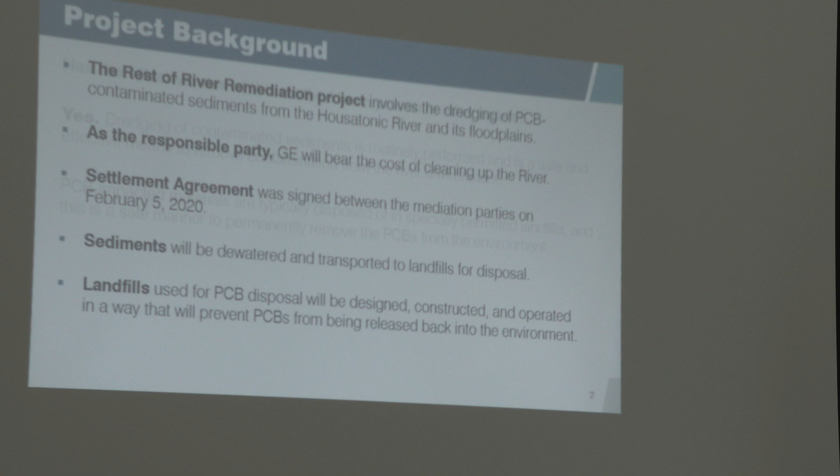At this point, I'm going to hand it off to Brian, who will be able to talk a little bit more about the Upland disposal facility design and our team's analysis.

I'm sorry, I didn't go through the slides, but if you go to the next one, there's some headshots of our team. Well, oh, you're already there. Yeah, great.

Okay, hi everyone. So as Linda mentioned, we are right now looking at the Upland disposal facility. This is the latest design document that has been submitted by GE and their consultant, Arcadis.

The UDF is essentially a new landfill that is going to receive the vast majority of the sediments removed as part of the Rest of River project. The landfill is being designed in accordance with the EPA category for hazardous waste landfill, known as a RCRA Subtitle C landfill. A lot of the details in this report reflect the criteria and specifications that EPA have established for design and operation of landfill of that type.

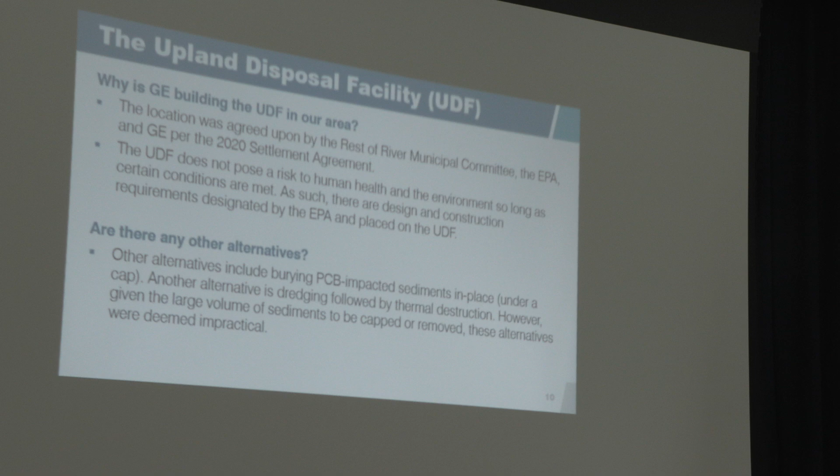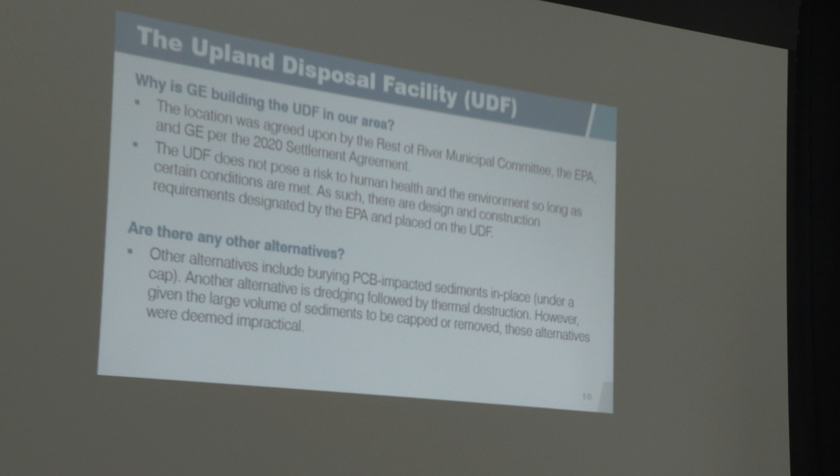So our review at the moment is looking at the design vis-a-vis those EPA guidelines and requirements, and also in comparison to what we know from current best practices for design of these facilities. So we'll get to that a little bit.

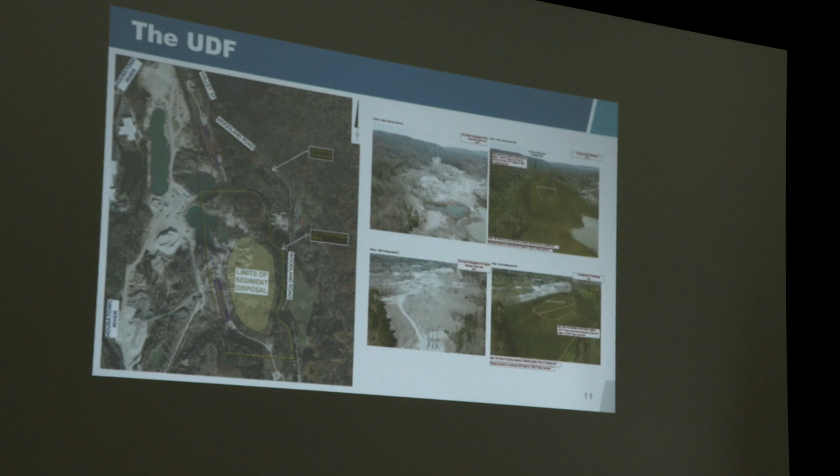So you guys might have seen some of these images on the town website. On the left-hand side, you can see the site for the UDF. It's located at a portion of the Lane Construction company facility just over the border in Lee. You can see the limits of sediment disposal - that's basically the footprint for the UDF.

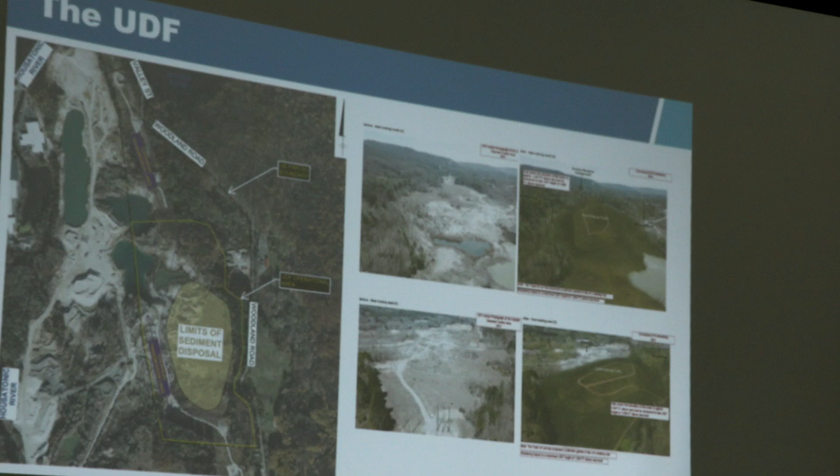At the site, we also have some power lines running through the site on the west side, so that does limit the footprint that's available. They also have areas for management of stormwater, operational areas that they'll need for equipment and materials during construction, and they've laid out some of these items in the plans that we've received.

The site will also have facilities for collection and storage of leachate - that's the water that infiltrates or leaches out of the sediment that's deposited in the landfill. So we have a system in place to collect that, pump that, and store that for us to export.

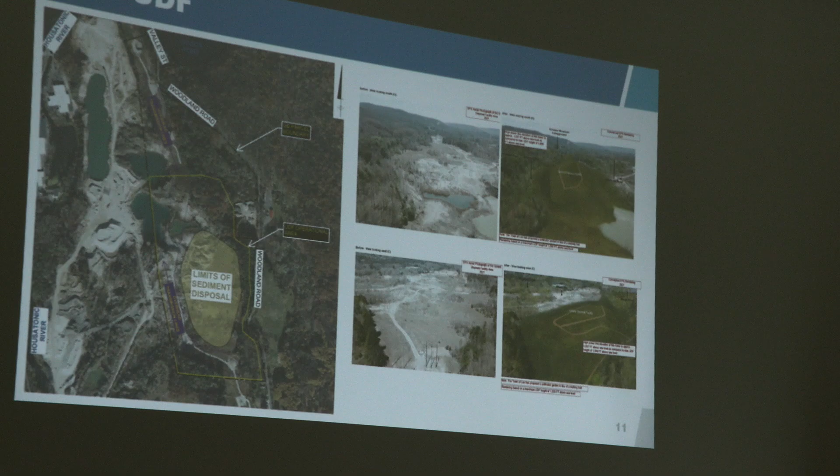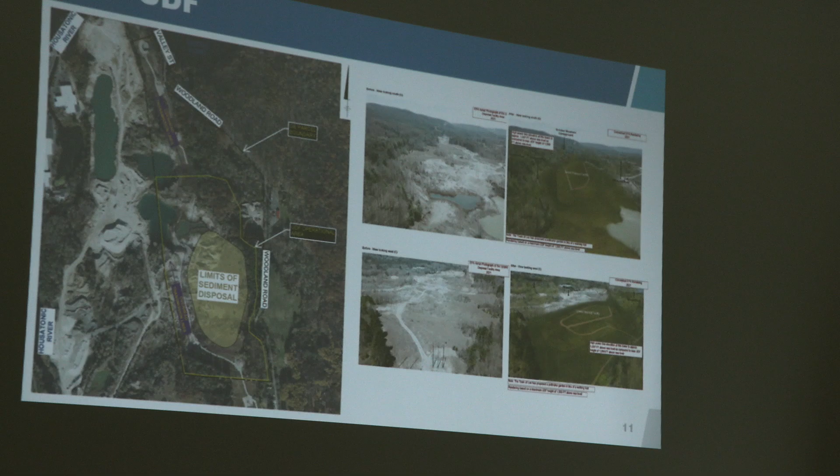I also included some images here of the Lane property as we see it today. You can see what's left from historic quarrying operations there - a pretty scarred landscape, not much vegetation, exposed sand and gravel and soil that's residual from the quarry.

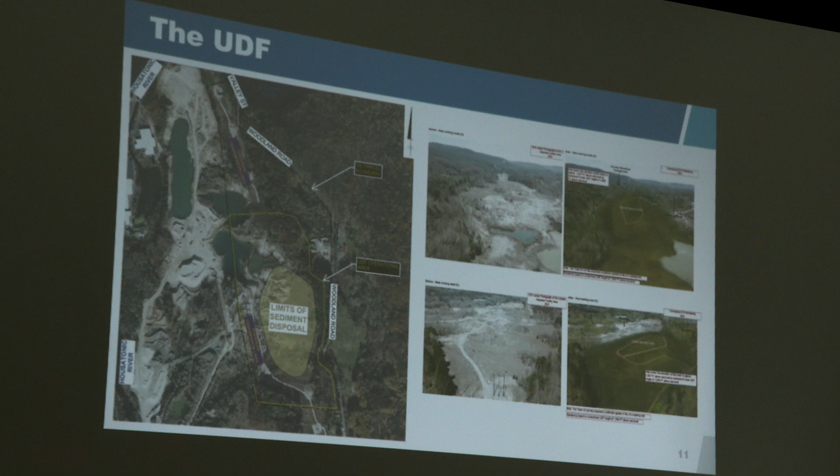On the right hand side, you can see the equivalent future rendering of what this UDF will look like. Just a big picture - you can see the green vegetated mound at the center of the site, and the line work that represents the access road for the landfill so that it can be maintained, mowed, inspected and so on. So I'm just going to give you guys that perspective before we get into the details here.

So the UDF itself - these drawings are from the design documents that we've received most recently from GE. On the left-hand side, you can see an engineering plan view of the UDF. It consists of, first and foremost, a perimeter berm.

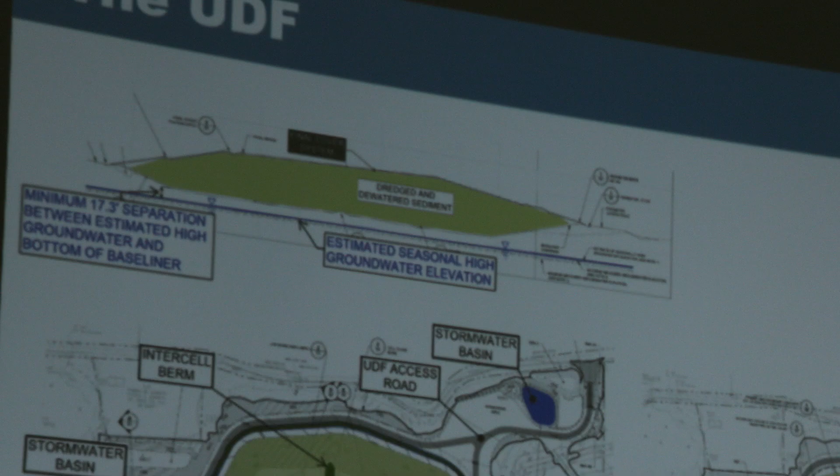So what they're creating here is essentially a bowl - they're excavating out material at the center, and using that material to build a perimeter berm all around. So you have what essentially looks like a football bowl, Pasadena Rose Bowl would be a good way of thinking of it. That's what's being constructed initially for the landfill in preparation for receipt of the sediment.

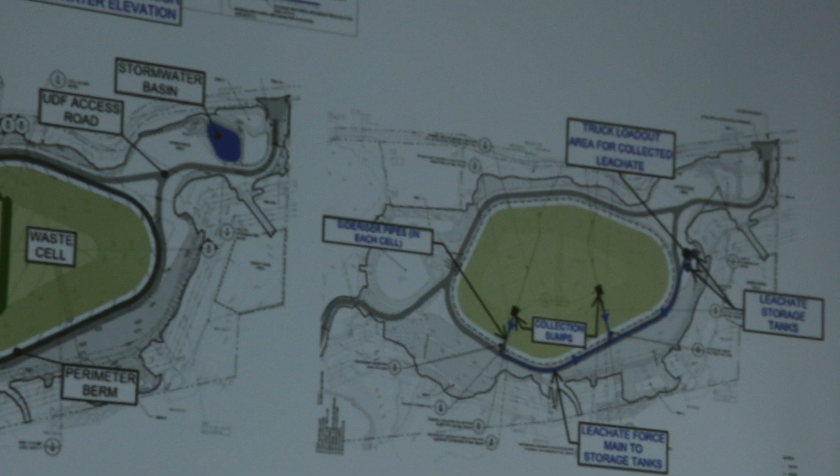Now that berm on the base of the landfill will be constructed with a liner. This is one of the main requirements of the EPA rules on Subtitle C landfills. The liner in this case is the protective or impermeable barrier that prevents leachate or sediment from leaving the landfill and re-entering the environment, whether it's in the soil below or further down to the groundwater.

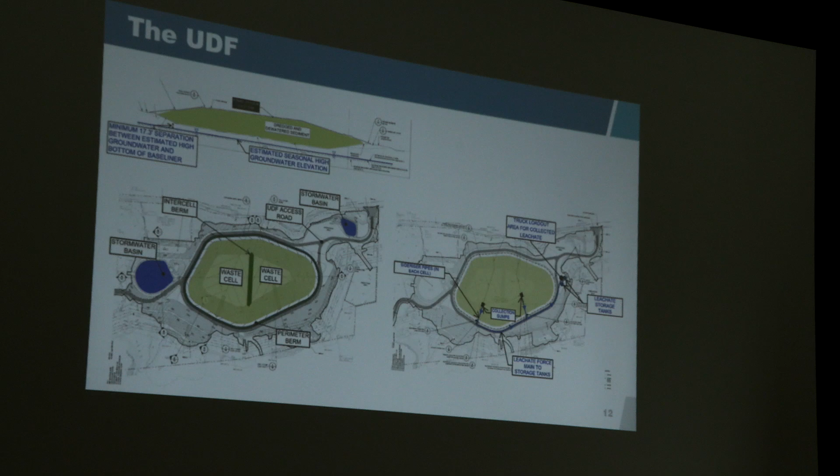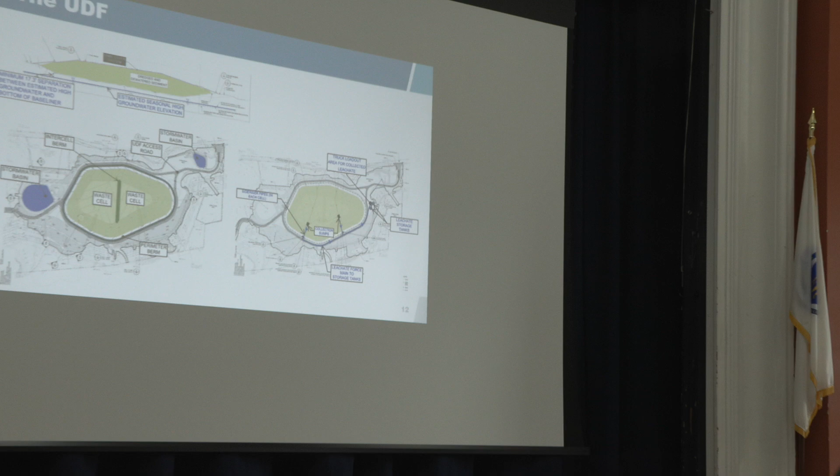That liner system, under these rules, is the most protective type of landfill. It's called a double liner system. There's two distinct layers: a primary liner as the initial protective layer, and then a secondary liner underneath that as double protection. And what that allows us to do is assess the effectiveness of that primary liner in preventing infiltrating leachate from going through that liner.

There's a leak detection system in between the two. It consists of a series of pumps with flow switches that will detect anything that passes through the first liner and down to the second liner. So that's the essence of the extra protection here - we have that ability to assess the function and operation of the primary liner.

The landfill - sorry, engineering drawings, please. Just a couple of other things: the landfill is broken up into two waste cells. This gives GE some ability to organize their filling operations a little more consistently, so that they can fill one side to a certain point, add a temporary cap to that so it's covered, and then work on filling the second cell, kind of flipping back and forth between the two.

So it's typical to see this in landfills that have a number of cells available for filling. What else do we have here?

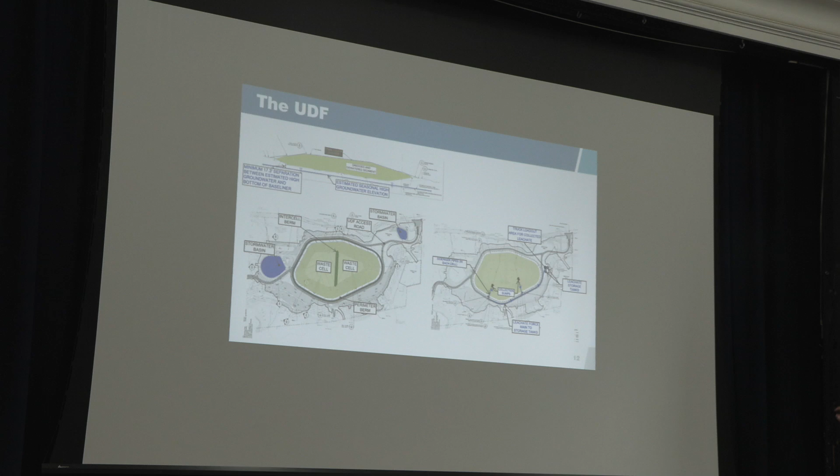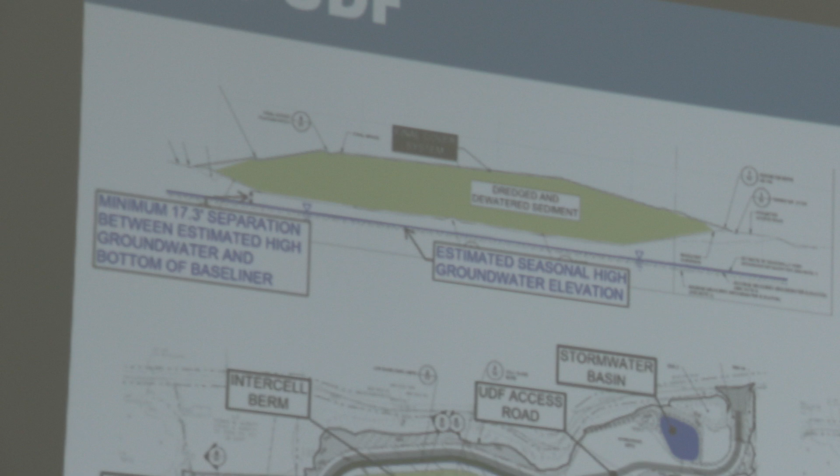On the top, we see what's called a section view, a slice through the landfill. The main thing this shows is the separation between the deposited sediment material and the groundwater at the site. Under the permit EPA established for this, the minimum separation to groundwater is 15 feet. This site is suitable because groundwater elevation is quite deep, to the point that a separation of about 17 feet is being achieved with the location of this landfill. I just wanted to show that on the top left.

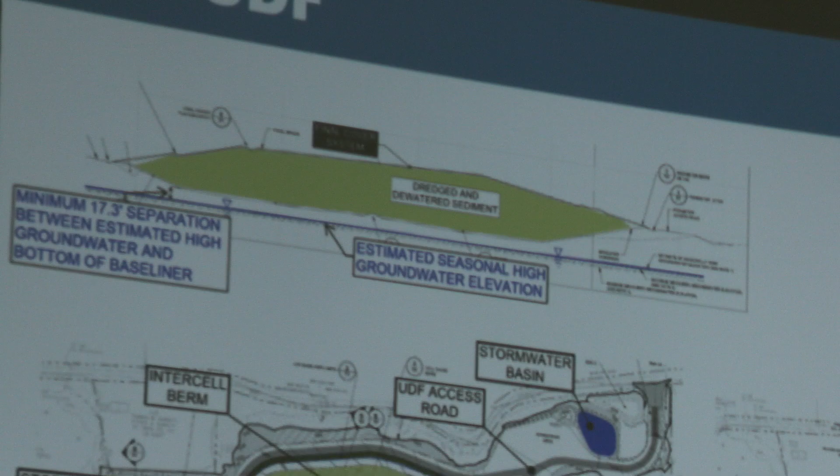On the right-hand side, I mentioned the leachate collection system. This is essentially a series of pumps positioned at the lowest points of each of these cells. Leachate passing through the sediment down to the bottom of the landfill hits this first primary liner, is collected in a series of pipes and drainage fabric, and channeled to these sumps. Within those sumps are pumps that activate on a switch system and pump the leachate up out of the cells, up to the top of the berm, into a main header force main pipe.

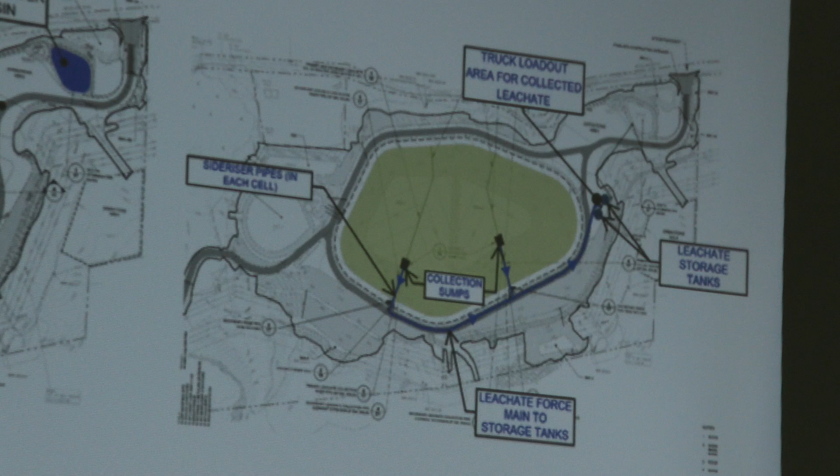That takes the leachate to a system of storage tanks, which you can see here on the right-hand side. From there it's stored until trucking comes and takes that leachate to another facility that's licensed and permitted to handle it and remove any possible PCBs dissolved in the leachate. So that's the system we have for leachate collection, typical for landfills of this type, a number of which have these leachate collection systems. That's part of our review of these documents, to look at the performance and feasibility of the systems.

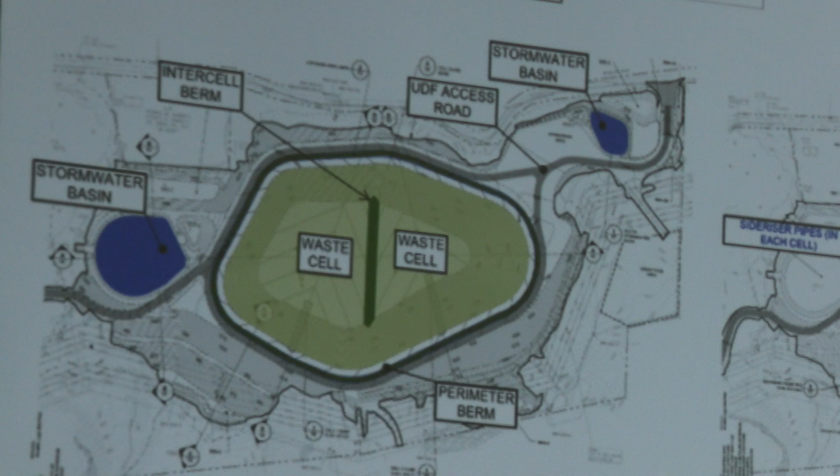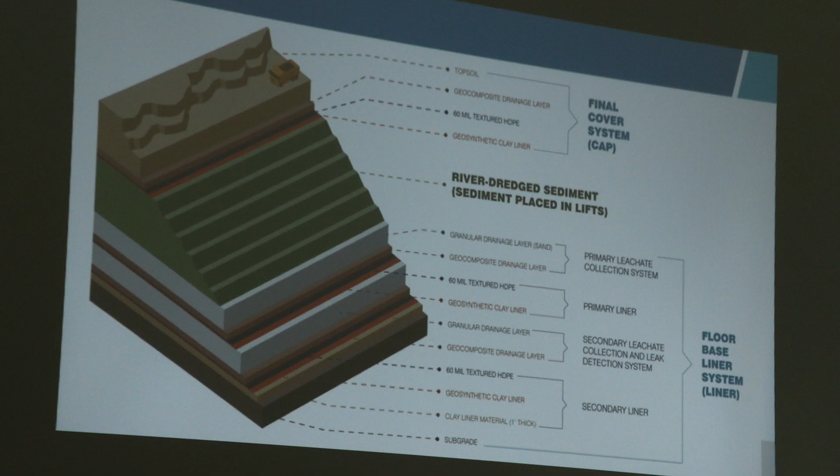This graphic here, I want to show a little bit more detail. At the bottom of the floor base liner system, you can see the different materials used for the primary and secondary liner. The primary liner is a material known as high-density polyethylene flexible membrane liner. It's a very thick plastic.

Now, could you grab that sample over there? It's essentially the same type of plastic used elsewhere, but much thicker, much stiffer, and highly impermeable. That's an example we have from the Turnkey landfill up in New Hampshire, the largest municipal landfill in New England. We have many facility engineers involved in that project, so that's from an actual landfill capping project we're involved in, so you can see the material that's used.

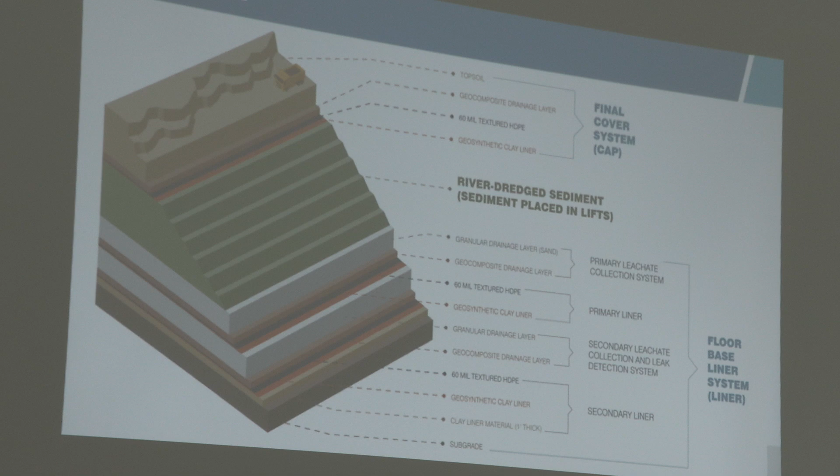What goes along with that material is another layer, identified here as the geosynthetic clay liner. It's a material invented with clay, placed between two blankets, two sheets of material that hold the clay in place. Once that clay gets wet, it swells to such an extent that it creates a very impermeable layer. So there's a section of the GCL—I'm going to pass it around for folks to take a look—you can see the bentonite clay in the middle, fabric at the bottom, and fabric at the top.

So again, our primary liner is those two materials in conjunction with each other. The secondary liner is the same thing all over again—those two materials make up the secondary liner.

As an addition to the secondary liner, the plans call for installation of a 1 foot thick layer of clay. Clay is the traditional material used for lining sites like these, back 30 or 40 years ago, before these newer materials were invented. Clay works very well and is highly impermeable, but it's difficult to construct—difficult to install and meet the requirements for placement and compaction so that it doesn't crack or open up and performs well. So construction of these materials, and the quality control that goes into them, is very important—for clay and for these other materials as well.

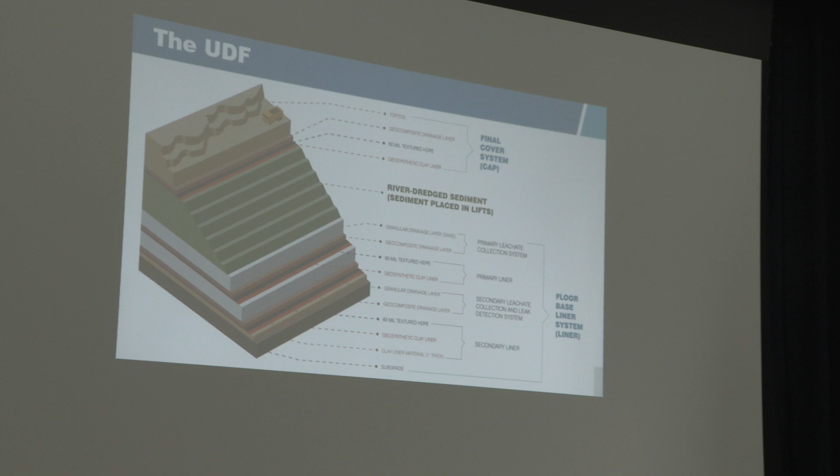We've looked at the primary liner and the secondary liner. In between, I mentioned the leak detection system. It consists of a granular drainage layer—a thickness of sand, essentially—that allows any leachate passing through the primary liner to quickly make its way down to the secondary liner, where it can be detected. That also includes another material.

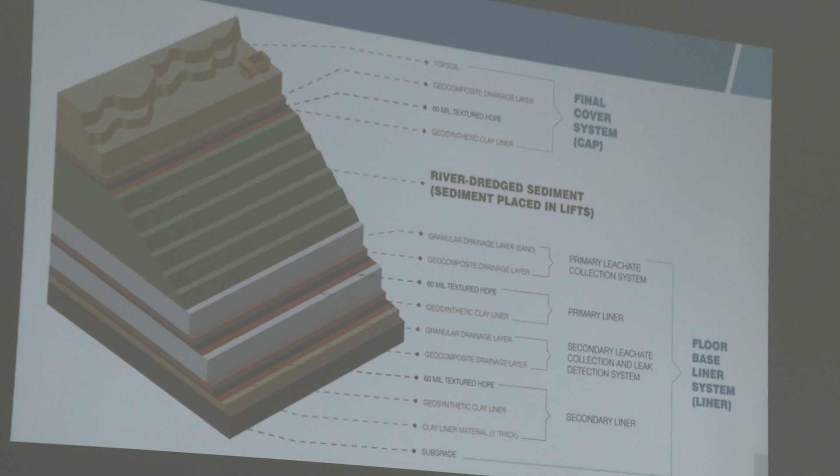This is another drainage material that helps move the leachate over to the pumps. It's a three-dimensional plastic material, a grid with a matrix of flow channels within it, so as soon as the leachate hits that, it can quickly travel through the geonet to the sump where the pumps are.

Above all of those liners, the primary liner and secondary liner, we place our river-dredged sediment. That sediment is essentially solid. Part of the process is to dewater the sediments, remove all of the river water held within the pores, and establish it as a material that can be placed with a machine, compacted, and built up in layers and lifts within the main body.

The last system is the final cover system, the cap. Once all the sediment is in place, we want to prevent any rainwater from getting into the sediment, because rainwater will generate more leachate, which has to continue to be directed. So this cover system is very important once everything is in place.

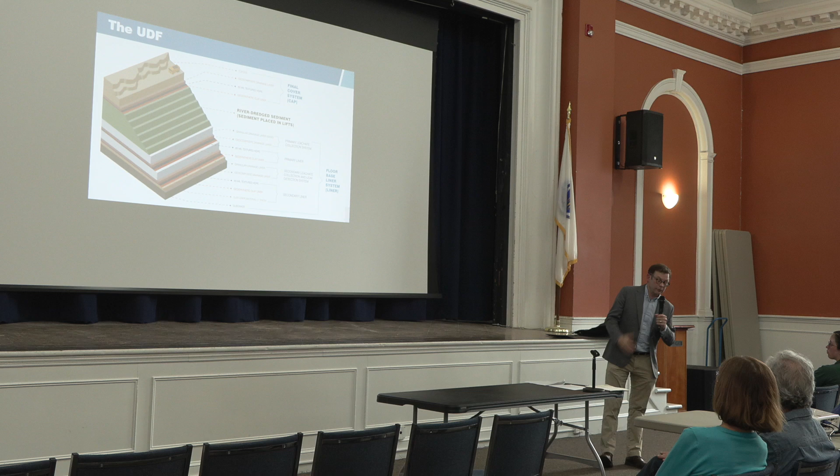The establishment of a strong turf on top of these landfills is very important. We want to avoid erosion, we want to avoid washouts, we want to avoid exposure of these cap materials to the open air and sunlight, because while they perform very well when buried, they don't perform well when exposed to sunlight - it tends to break down the structure of the material. You have to make sure these materials stay covered at all times. So that's essentially the design of the UDF and its layers.

Not going to go on to this. This slide here, I think, is available on the town website.

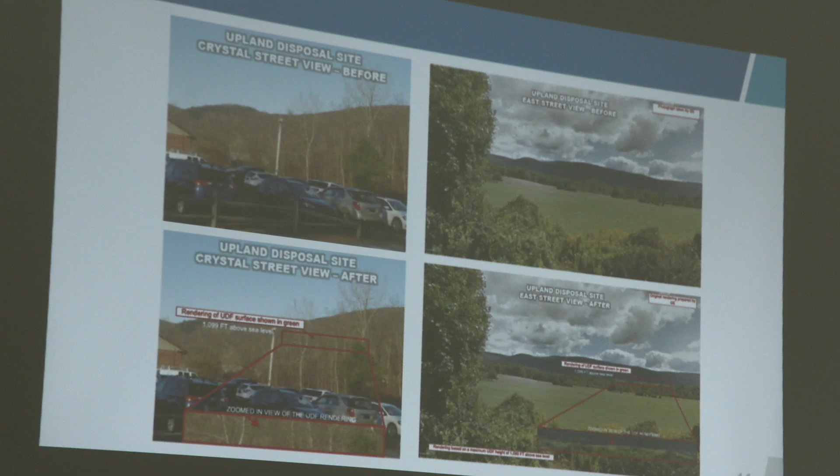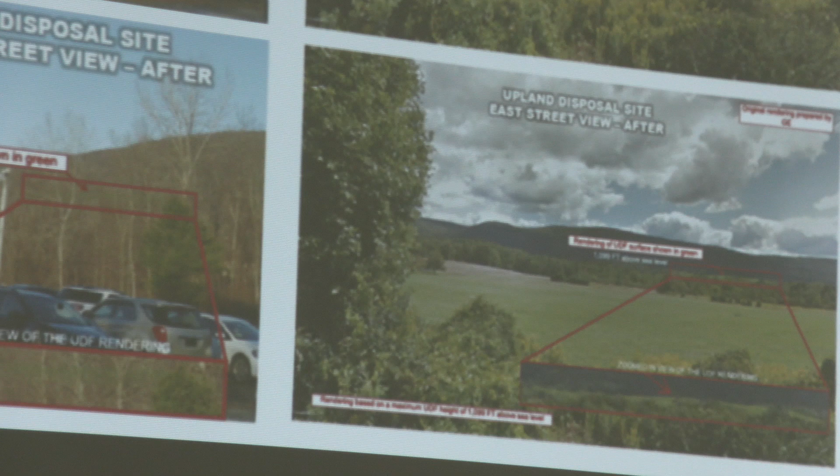It represents some renderings for how the UDF will look from certain vantage points around town. On the left-hand side, we have views from Crystal Street. It's kind of hard to see, but through the trees at the bottom, you can see they've rendered what this UDF is going to look like from that perspective. You can see a very thin green line through the trees and the red box at the bottom - that's what you'll see at that time of year from that location.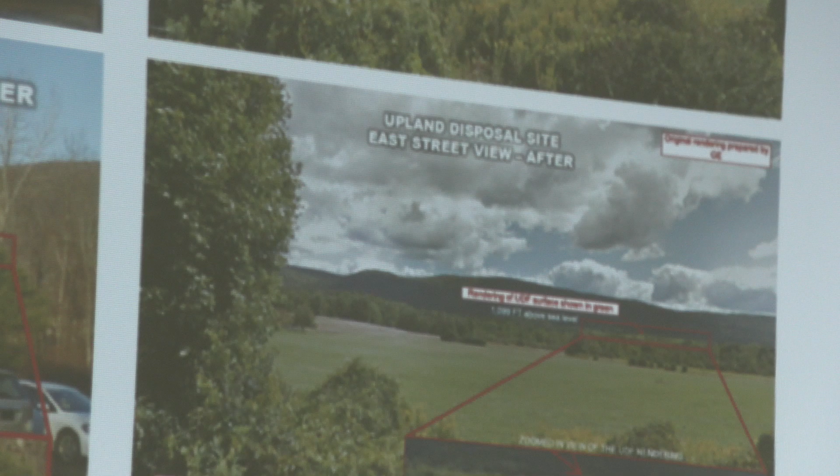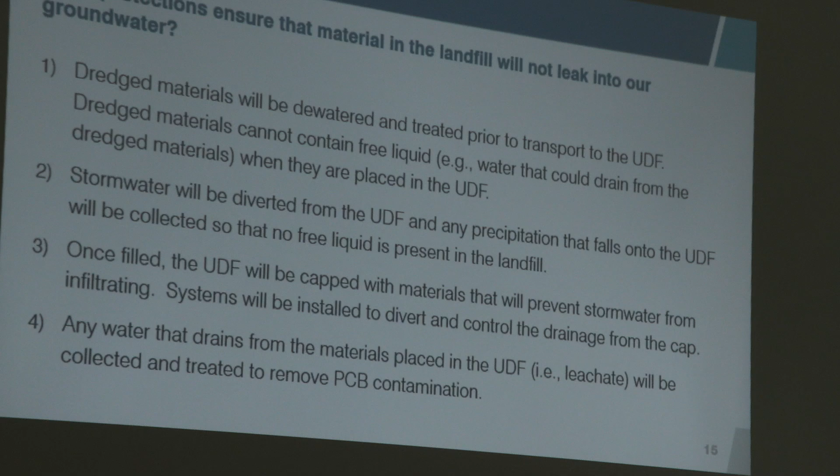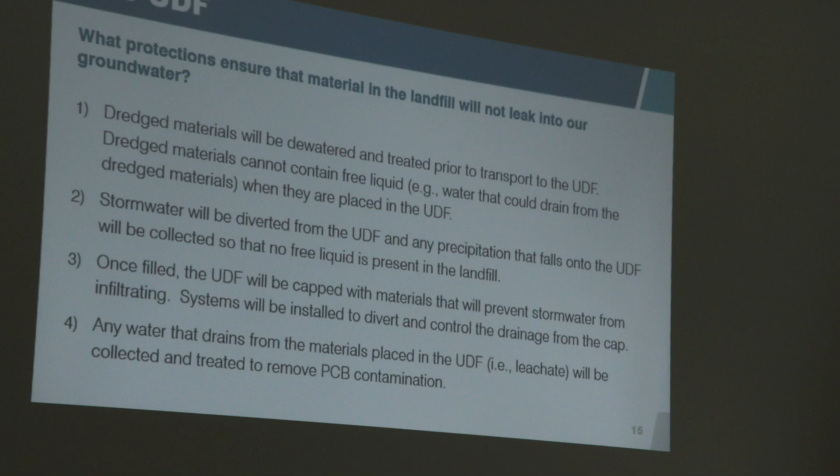Just to go through some of the protections we're reviewing here as part of the UDF design: first of all, the dredge materials cannot contain free liquid. They need to be placed in the landfill in a dry condition, free of liquid, essentially.

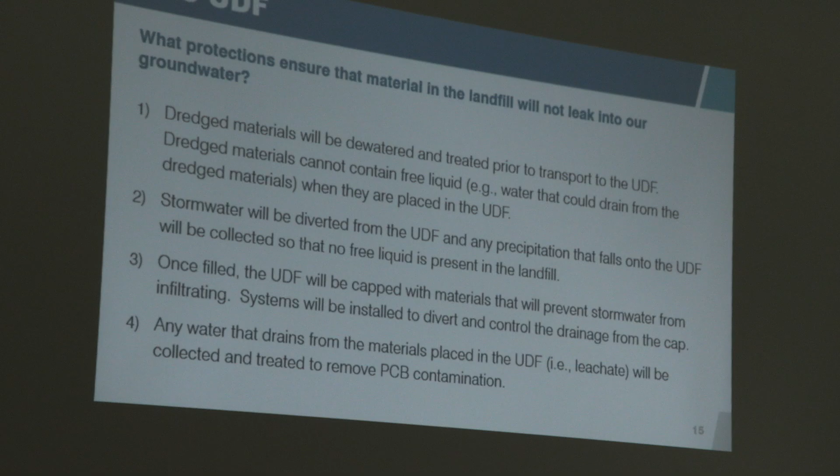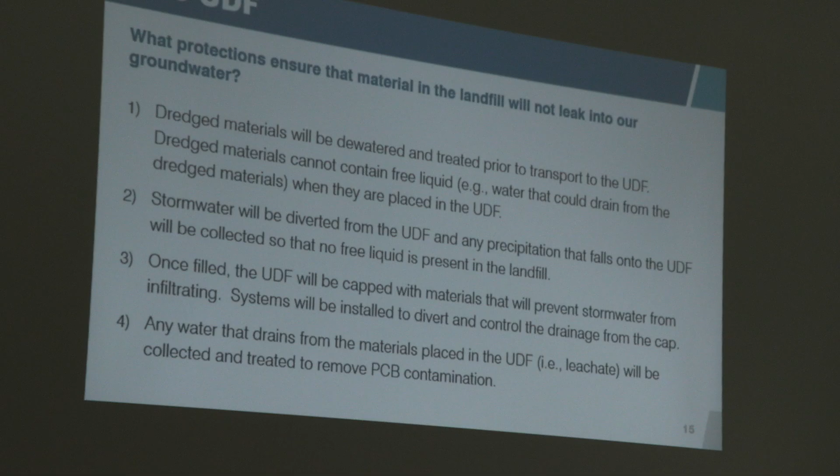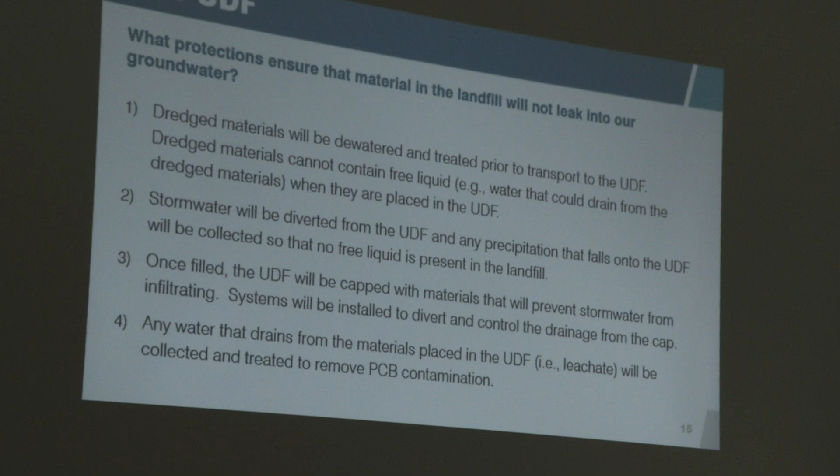I'll get into this in a minute, but this does bring up one of the main comments we have so far on this document. GE have mentioned the use of hydraulic dredging to remove some sediments from the river - that's essentially removal of sediments in a slurry form, almost fully liquid, pumping it through the dredge head into a pipe, sending it down to the storage facility. That material is a flowing liquid; somehow it has to be transformed into a solid that can be placed in the landfill. We need to see more detail from GE as to how they plan to do that.

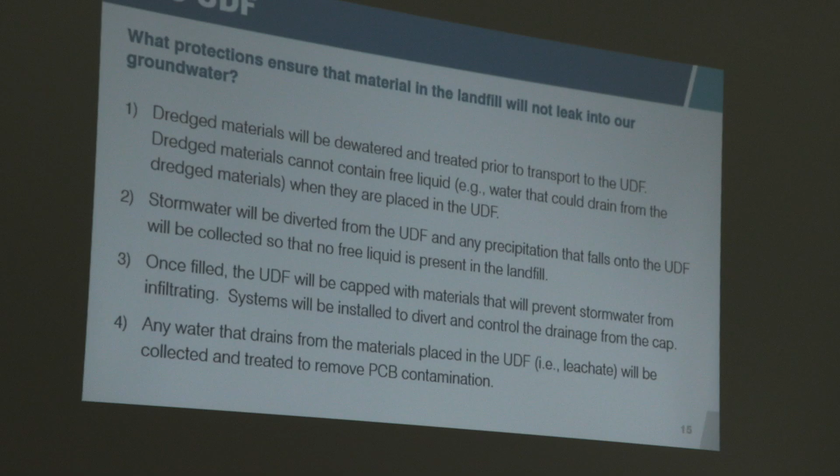It may be something that has to take place next to the UDF. If that's the case, it's going to need to be a big area with volume. Do we have an area on site that can be used for that? Is there space available? All questions that we need answers on. They have alluded to actually using the cells as a space for dewatering the slurry, but how that all happens, we haven't seen any details. We need to see more, and we'll definitely be asking questions on that.

Number two, stormwater. Obviously, while the cell is in operation, while it's being filled, it's going to receive a certain amount of precipitation.

That precipitation, once it's in contact with the sediment, is considered leachate. That has to be collected, put in tanks like I showed you, and taken for disposal.

It would be optimal to minimize the amount of rain that falls in contact with the sediment. We would like to see some more details on that. So that's one thing we've commented on here. What else do we have?

I think we've covered that at this point. It looks like this.

Are there long-term monitoring requirements? Yes, there are. GE is responsible for the long-term maintenance and monitoring of the facility, and will bear all costs for doing that. Post-closure monitoring.

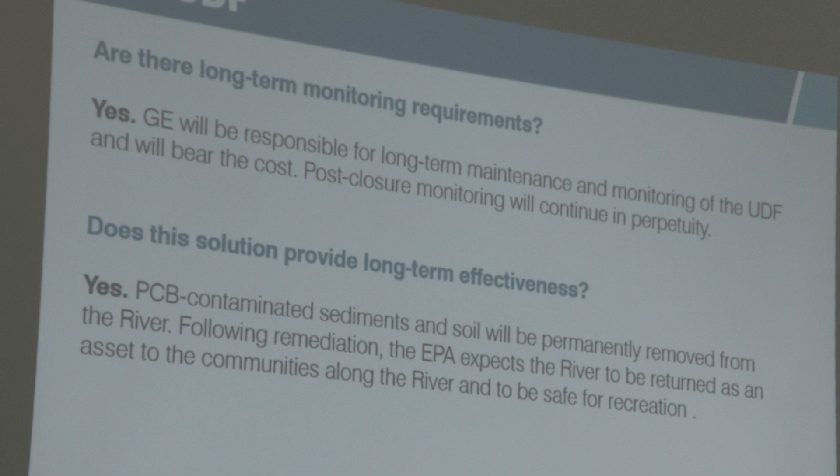This is after the sediment has been placed in the UDF and it's been capped. Part of the monitoring of this facility is sampling of groundwater around the perimeter of the landfill to make sure there are no contaminants inherent in the UDF impacting groundwater. That monitoring is called post-closure monitoring, and it has to happen in perpetuity of this project.

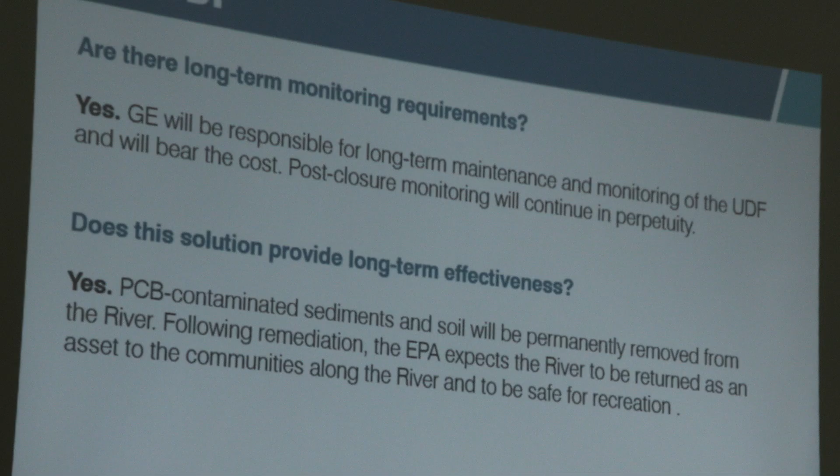Does this solution provide long-term effectiveness? Yes, in the sense that the PCB impacted sediments, which are essentially an uncontrolled release to the environment, will be removed in a permanent fashion from the river and wetlands, and contained within the UDF.

By doing so, I think we'll get our river back, right? It's now available to the community as an asset for recreation, fishing, boating, and so on.

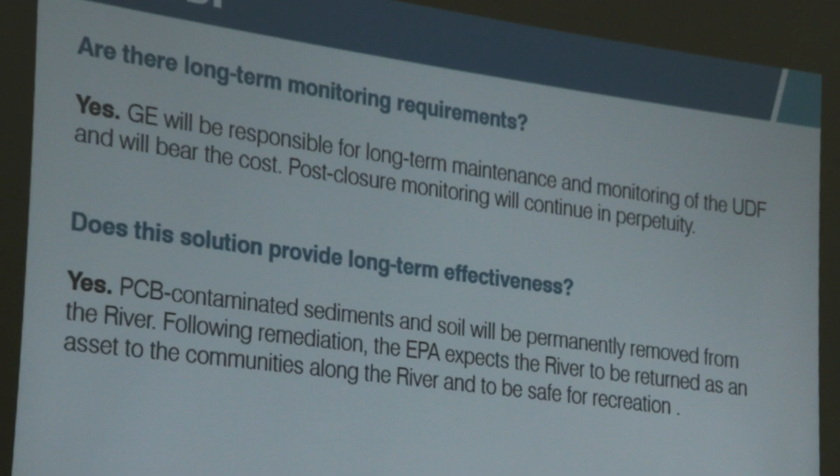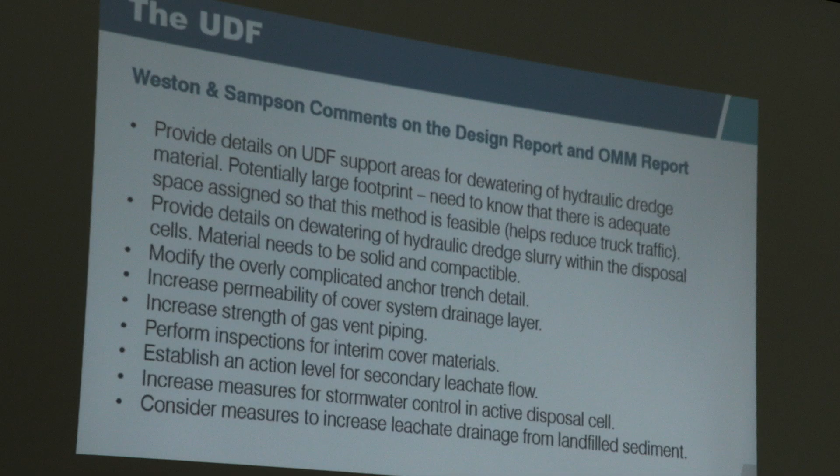I put a bullet list here of some of the comments we have so far. I guess you could say we have them in two buckets. We have very specific technical comments for comparing their design to the EPA requirements, and again to what we see as best practice in the industry.

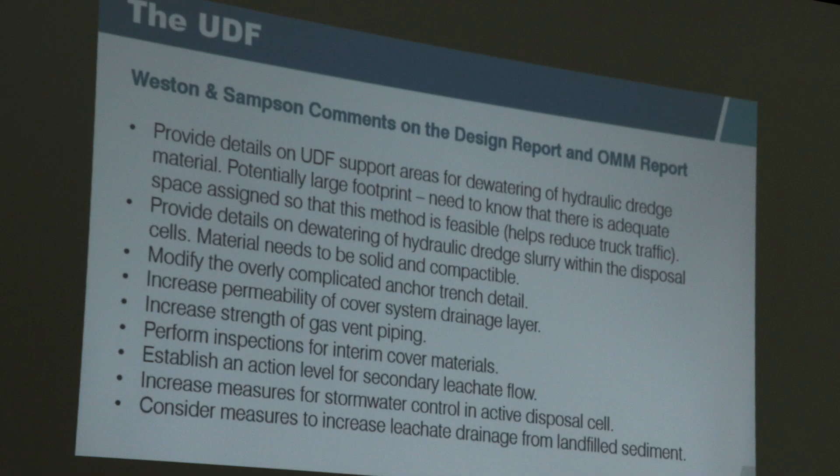Are there significant comments? Well, put it this way, they can be easily addressed. I think they're perfectly acceptable comments that should be incorporated into any revisions to the design here.

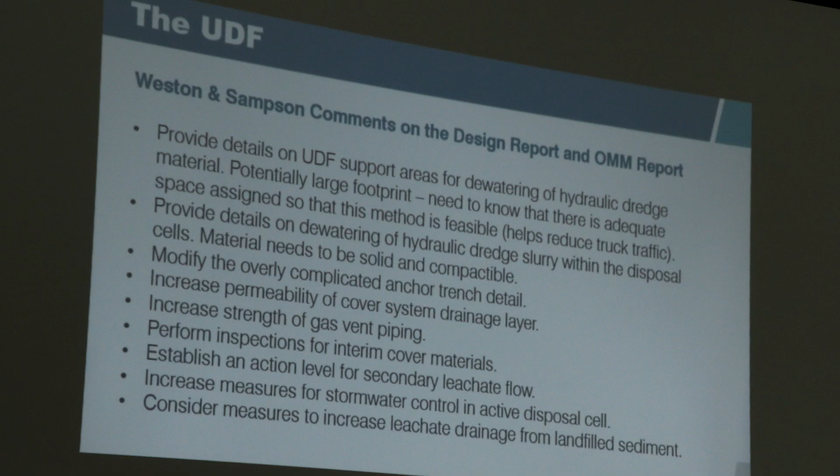The second bucket is the bigger picture, and I alluded to this with how the hydraulic dredge material should be managed. I don't think we want a situation where in a future report we find out hydraulic dredging isn't considered feasible, because that's why we moved to the UDF site. So we want them to think of that now, account for that now, and give us more detail at this point so we can ascertain whether this is viable or not, because I think it would be a benefit to the town to avoid trucking as much as possible.

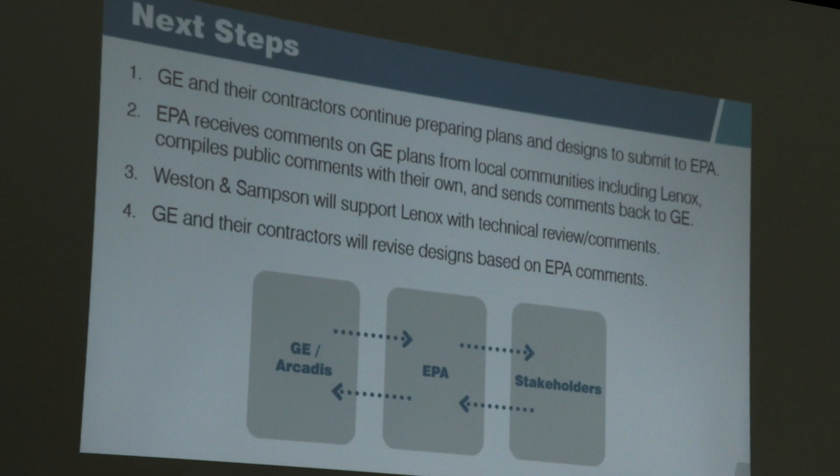In terms of next steps, GE and their contractors are going to continue preparing plans and designs to submit to the EPA. The EPA will receive those comments from local communities, including Lenox, and compiles those public comments with their own and sends them to GE to address.

Weston & Sampson will continue to support the town with reviewing these documents through technical review and comments, and GE and their contractors will have to revise their designs based on the EPA's comments. At the bottom, you can see the cyclical nature of how this comment relationship with the EPA and GE works. If you go to the next slide, Marco.

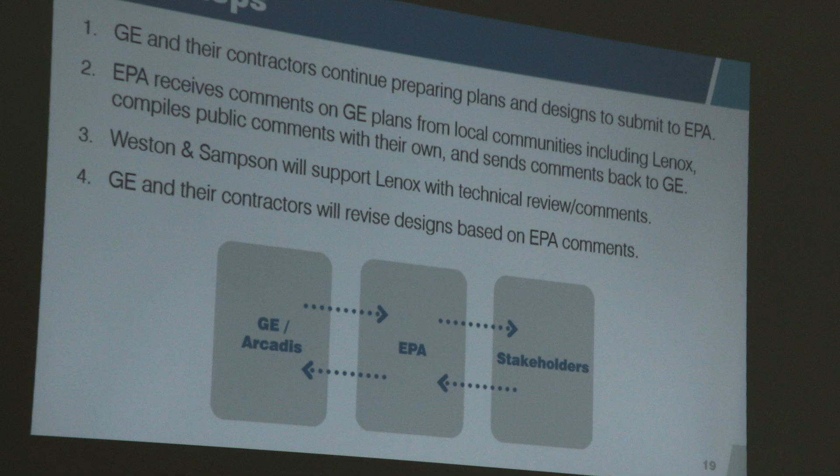The last slide is about what residents can do at this point in time. The EPA is accepting public comments at R1Housatonic@EPA.gov.

You can see some of the comment periods have passed, but the comment periods for the revised UDF final pre-design investigation summary report, the final design plan, and the operations monitoring and maintenance plan are all due May 20th. And the Woods Pond Dam Phase 1 inspection/evaluation report is due in two days, on the 17th.

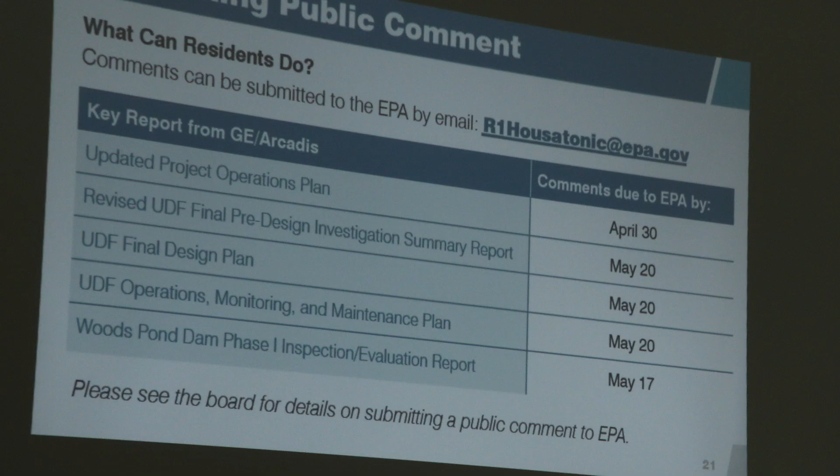We have a board with details and tips for how to craft an effective comment to the EPA. We have them here.

Keeping them focused on the topic at hand is helpful for them to focus in. Use specific examples to illustrate your concerns, clearly define your objectives, and use headings or bullets where helpful. Being respectful, clear, and concise can make it easier for them, reviewing hundreds of comments, to process and understand the importance of your comments.

If you scan these QR codes with your phone, you can go to the EPA's webpage on the Housatonic Rest of River Remediation Project.

The town of Lenox's public library webpage has everything compiled in a good way from the Lenox perspective, with the project background as well as links to documents from the EPA. Materials will continue to be posted on the library's website, so that's a good place to bookmark to go back to as this project moves forward.

And the next slide, Marco.

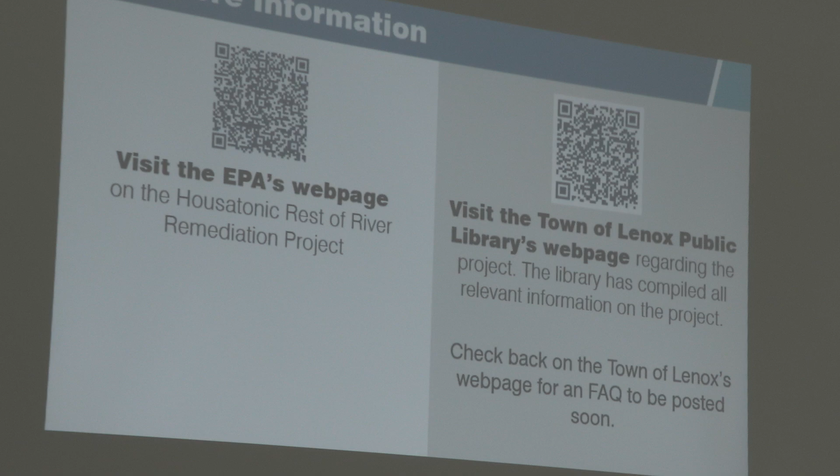Yeah, so that's all we have for the presentation, and I think we can probably take any questions if folks have them.

Hi, Susan Wolf, I live in Lenoxdale. I'm wondering if it's helpful if there were a lot of comments. Weston & Sampson has made a comment, the select board of the town has made a comment. Does it also help if hundreds of residents make the same comment? Does that persuade EPA?